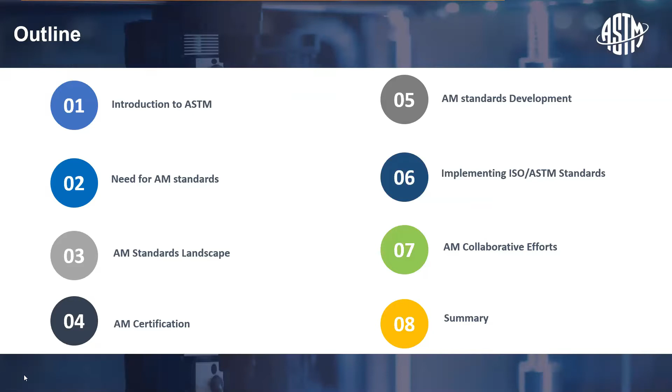So why do we need standards? Why do we need AM, additive manufacturing, standards? Essentially, additive manufacturing is no longer a prototyping technology. It is now moving into an industrialization mode, which means we need specialized, well-defined procedures to do additive manufacturing activities. So before going into those details, let me introduce what ASTM is and what we are doing

from a standards perspective. ASTM International is an international standards development body, and we have standards from the oil and gas industry to construction, spread into a wide variety of industries, and we have more than 12,800 standards so far developed and used widely across the world. It's not based on the US alone. More than 60% of the standards are currently used outside the US, and they're applied in 90 plus industry sectors.

ASTM International has more than 30,000 committee members, and we leverage the technological know-how of these committee members for developing the standards. And we have more than 140 different technical committees working on developing multiple standards. So this is a very brief snapshot of what ASTM is. As we move on, I can share much more details.

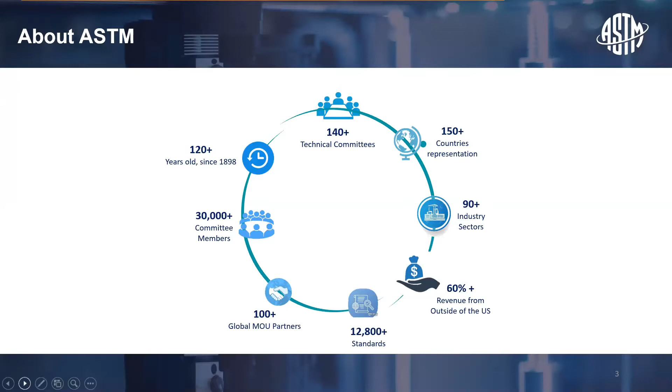So when it comes to additive manufacturing, like any other technology, we need standards to move through. Now in almost all industry sectors, additive manufacturing is at the tipping point of adoption. So we need standards, we need qualification processes, we need certification. What standards can do is ensure process control, give you an assurance of your quality, define different levels of criticality, reduce the risk quite a bit, and by that reduce the cost and drive the larger adoption of additive manufacturing.

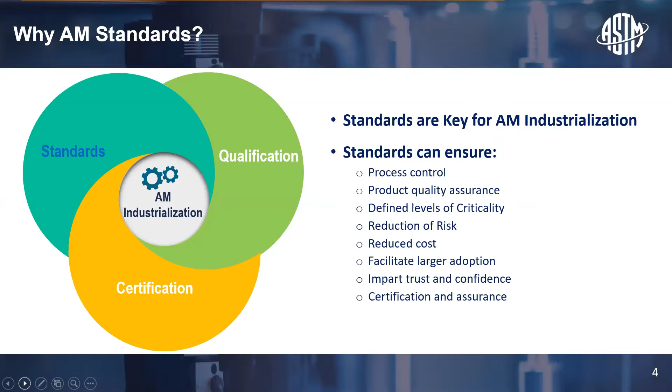Another two important aspects are to impart trust, and it can also provide support for certification and quality assurance. So when we look into additive manufacturing standards, one of the important aspects was to see what standards are needed to drive the industry. So there is the Additive Manufacturing Standardization Collaborative. It was a collaborative effort between ANSI and America Makes.

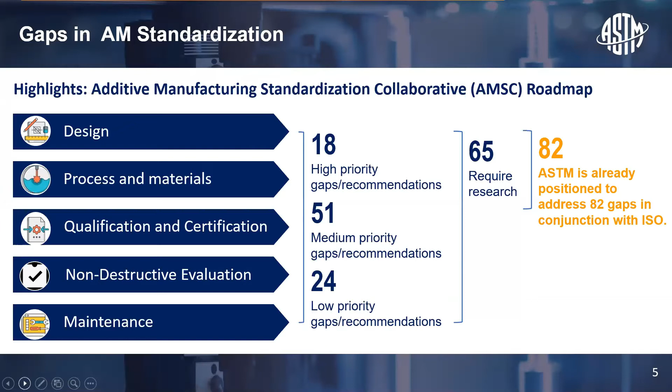They categorized different areas in additive manufacturing into design, process, qualification, non-destructive evaluation, and maintenance. And they found more than 18 high priority, 51 medium priority, and 24 low priority gaps. Out of all, they also found that more than 65 such gaps need R&D, research and development, to move further. Filling those standard gaps is not easy because additive manufacturing is a relatively new technology, and it has boomed in the past few years. So we don't have enough data to look upon, and

input is from all the people involved in it, and multiple organizations are working on the standards. That could cause potential duplication as well as overlap of what we are working on. And we also need research and development as well as resources to do validation experiments. So these are all the things which limit the standards.

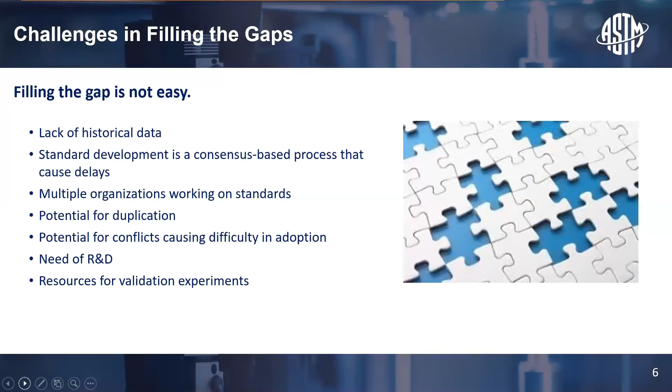If you look into the current additive manufacturing standards landscape, there are about 25 plus standards published by ISO and ASTM together, and another 50 plus standards currently under development. You can categorize these available standards into 3-4 buckets, like general additive manufacturing standards, application specific standards, feedstock material standards, process and equipment related standards, and organizations are also actively involved in developing these AM standards specifically for their industry sectors.

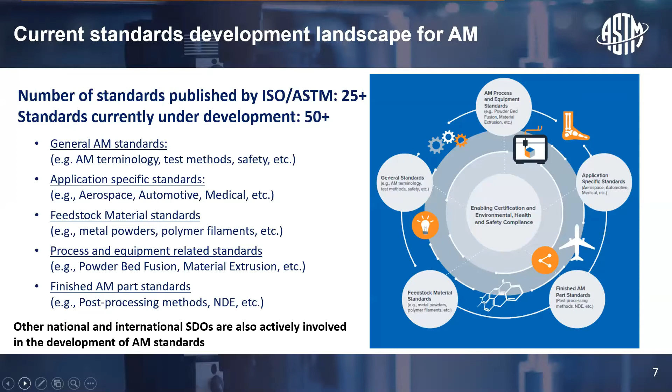When it comes to certification, based on an earlier analysis, one of the major hurdles that additive manufacturing industrialization is going to face is in terms of certification. For the next 10 years, certification of finished parts and products, then quality and standardization of material, and quality are the stumbling blocks that we need to face when we look into the industrialization of additive manufacturing. And this can be addressed at different levels: international bodies, national agencies, different end users, and organizations like that.

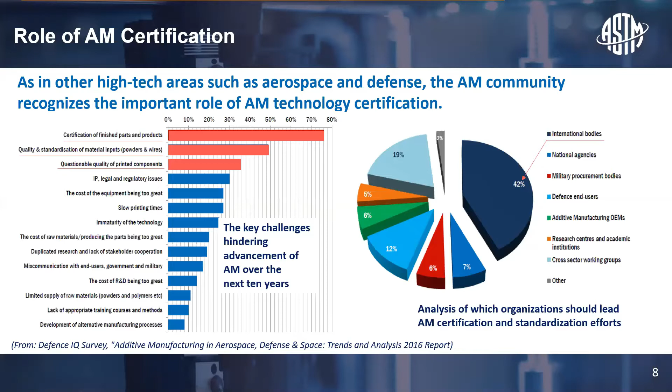But for certifications, the most important thing that we need is standards. At the moment, there are no broad certification frameworks. Even though certification programs have started, they are not complete. If any organization wants to provide such an end-to-end solution, definitely we need enough standards which can address it.

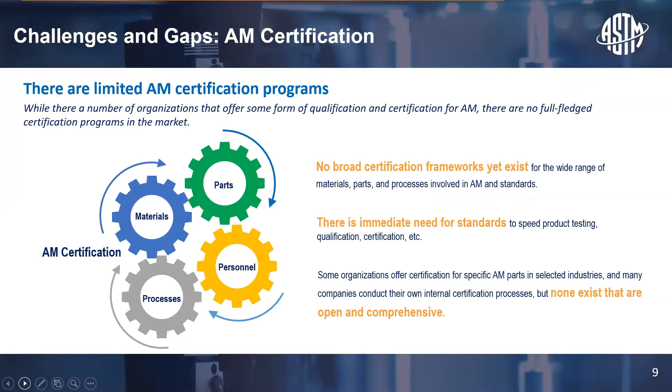So how do we help accelerate additive manufacturing in all industries? It's not specific to aerospace or medical, but considers all different industries for manufacturing. And the additive manufacturing footprint at ASTM: at that time, the first additive manufacturing standards committee started.

F42 and ASTM also have collaborative agreements from different standard development organizations, and one of the notable ones is the partnership SDO with ISO TC 261, which just happened back in 2013. In fact, this collaboration was a strategic one because it drove the additive manufacturing standard development process at a much faster pace. 25 standards are out right now.

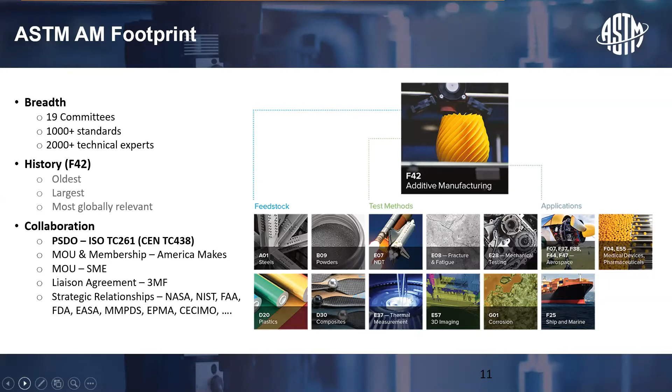In addition to the collaboration with different standard development organizations, ASTM also has collaborative efforts with NIST, FAA, EASA, MMPDS, and organizations like that. So a quick fact about this ASTM F42 committee, which makes standard development, is that, as I said before, it started in 2009, and we have more than 800 persons involved in it. 25 plus standards have been published so far, and 50 plus are under development.

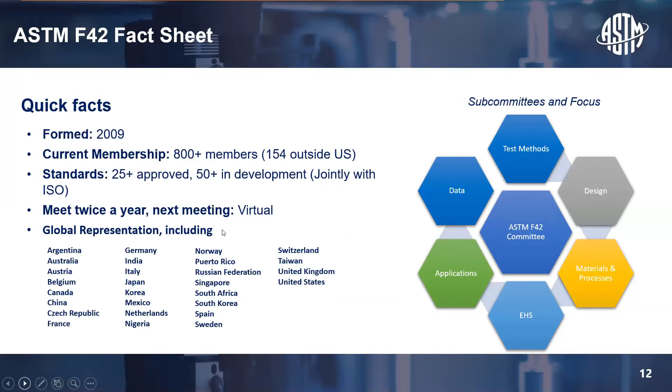If you see the structure of ASTM F42, it consists of multiple committees called test methods, design, material and process, environment, health and safety, applications, and data. Data is the latest one added. You can see who leads this effort. These subcommittees are led by industry leaders or institutes. All these committees right now go from F42.01 to F42.07. These are currently active, and F42.08, as I said before, is the new committee started for data.

This is the standard development structure followed by ASTM and ISO together, developed by ISO ASTM as a roadmap towards development of standards in the coming years. There are 3 tiers. The first is the general or top level standards, which can be applied across any industry, any process, so it is process agnostic or material agnostic. Further down, it becomes category based, more towards the process and equipment and finished parts. And at the specific level, standards are developed for very specific applications or industries. This is the approach ASTM and ISO are following.

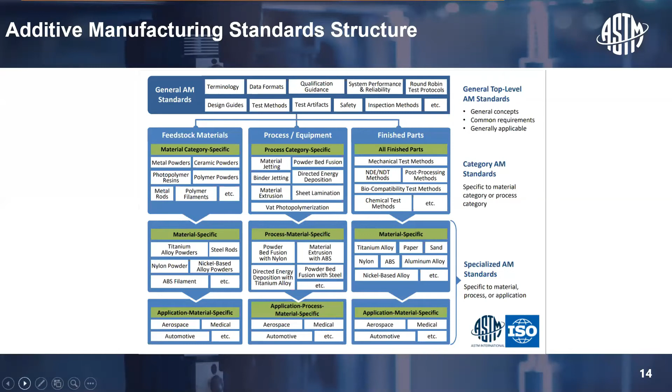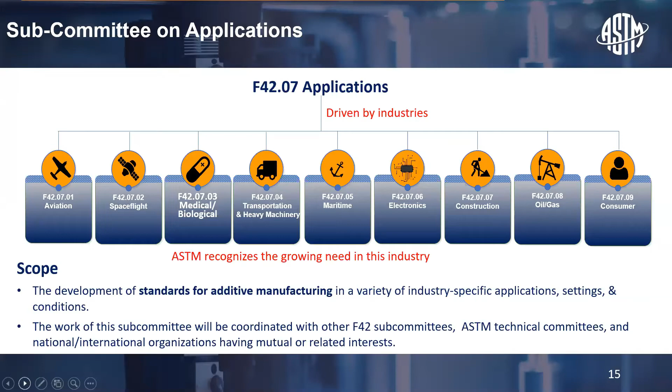Into an AM process chain. We know that the additive manufacturing process is a complex one. It is similar to any other technology, but it is complex because of the multiple stages involved, and each stage has potential variabilities, whether it is design, feedstock, material and process, or post-processing. We need tighter control in all these stages. All the standards under development or already published are focusing on each and every stage of the additive manufacturing process.

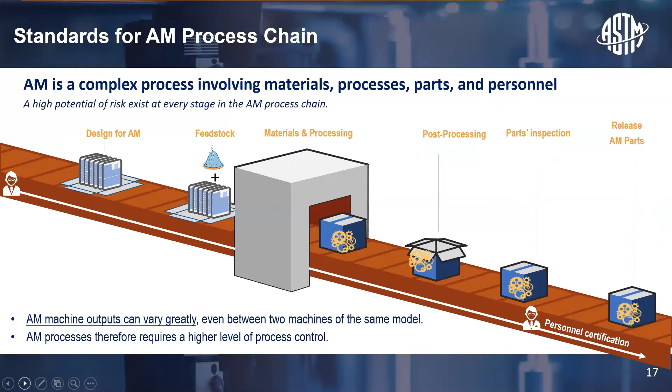Here is a snapshot of different standards currently published. Most of the standards you see here are already published, and I put them in different buckets. To start with, whether you're experienced or new to the additive manufacturing industry, the first standard you should look at is ISO ASTM 52900.

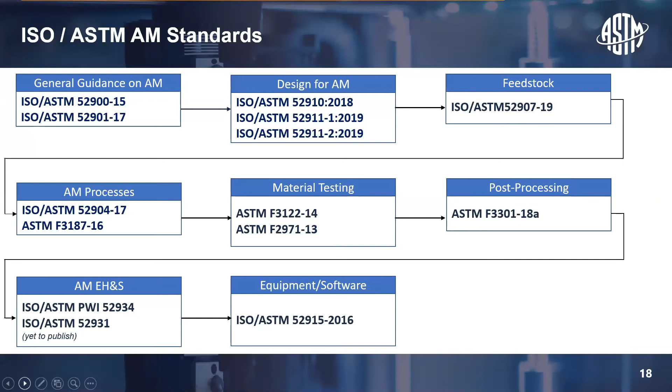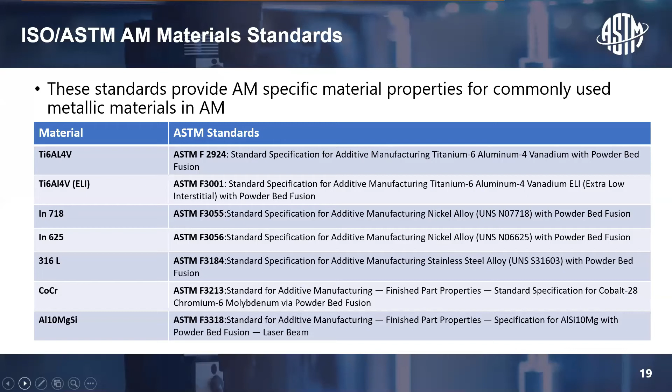When it comes to material, there are material specifications particularly for additive manufacturing materials. Materials like titanium or Inconel have material specs in conventional manufacturing, but the specs here are targeted to additively manufactured components. So if you're looking for a finished part in cobalt chrome, you should look at ASTM F3213 to see the standard specification you need to meet. These are the material standards currently available under ASTM.

Qualification is another important aspect. We have a lot of standards, but how are we going to use them for a meaningful purpose, for qualification of your facility? This is a list of standards you can consider for qualifying your process. For example, ISO ASTM 52930 is about to publish, maybe within 1 or 2 months; it's currently under ballot. Another one is ASTM 52941, to check system performance and reliability. This is also going to publish soon.

Now it is in a draft international standard form. And 52904, which I mentioned before, can be used for qualifying your process itself, and that standard is already published. And ISO ASTM 52902, the standard is about to assess the capability of your machine by using test artifacts.

And one more standard that you can look for is 52920. It is not yet published. It is a new work item proposal that is basically on qualification principles for an additive manufacturing site. So if you have these 3 to 4 standards in the beginning, I think this is the first step towards qualifying your process in your premises.

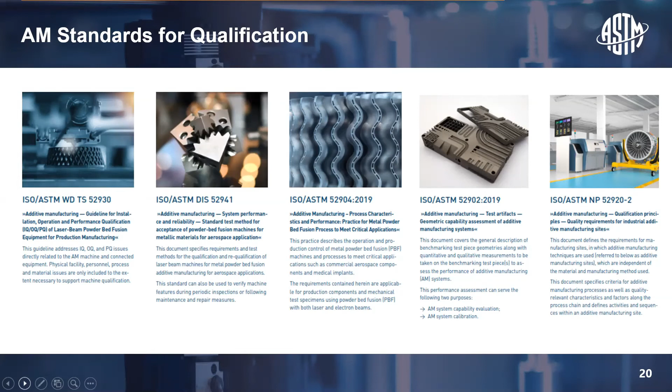So now we move on to the collaborative part of additive manufacturing. So we have seen the standard development side of things and how we are going to drive the standard development with some collaborative efforts. So keeping that in mind, ASTM has come out with a unique activity called Additive Manufacturing Center of Excellence. So what the Center of Excellence does is it bridges the gap between standard development and the

collaborative activities. So we know that standard development is a consensus-based process and it takes a long time since we don't have enough data out. There are delays in getting it done. So the main aim for the ASTM COE is to support that part. So ASTM COE supports the standard development activity through research and development by collaborating with ASTM COE partners.

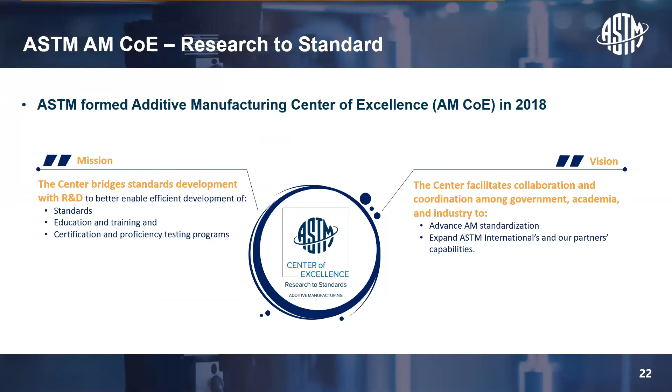Then there's a clear distinction between the ASTM F42 Committee and ASTM COE. ASTM F42 Committee is purely for making consensus-based standards in collaboration with ISO TC 261 at this moment. And ASTM AM COE is mainly for providing a platform for collaborative partnerships with the different stakeholders from the ASTM F42 committee members as well as from the AM community in general. So ASTM AM COE provides a link between the ASTM F42 committee and the rest of the AM community.

And these are some of the research activities that we are currently progressing with to support different standard development activities. You can see that we have design, data and modeling, feedstock, AM processes and AM testing and qualification. All those things are linked to some of these committees like F42.01 on test methods or F42.04 on design and things like that. So all these research activities in one way or other support the standard development activities.

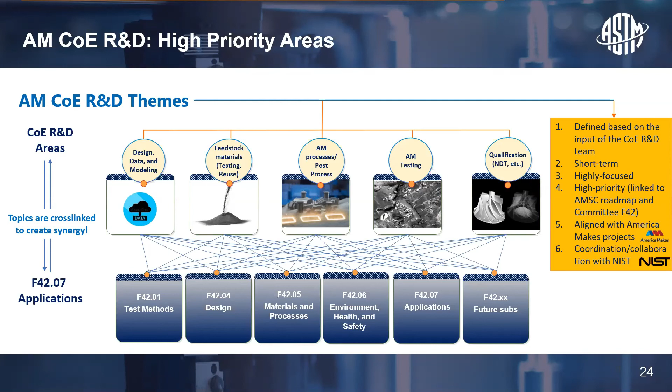So if you see here, this is a typical example of how past research has supported the standard development. So we have 2 rounds of projects completed so far, and these projects are directly impacting the existing standards as well as addressing the standard gaps. So we can see all these institutions over here. These are all the partners for research and development for additive manufacturing with ASTM.

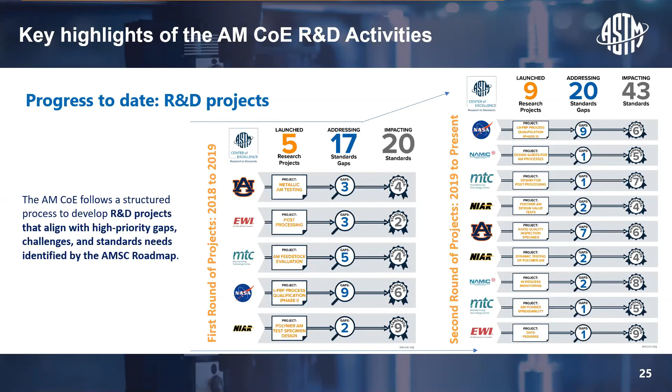So MTC is our partner in the UK, NAMIC is the partner in Singapore, it covers the Asia part as well, and we have Auburn University, EWI, and NASA, they're all the partners back in the US. So with their support, we are doing this research and development and make sure that this can directly impact or drive the standard development activities.

And so we have 2 ways of supporting the research and development. One is called a request for ideas, which is basically from the ASTM committee members. So once we have those ideas, we take those ideas and do research projects with our AM COE partners.

The next one is a new one that's called Call for Projects. This is now open to the entire AM community. So whoever has a research idea which can support standard development, you can propose a project, and if it is in alignment with the standard development process, then we will fund that particular project.

And you can get involved with ASTM in multiple ways. One is, as I said, through these R&D projects, and you can also be a part of the work item development, which can be initiated for the ASTM F42 standard development. And there are a lot of COE events happening, and there are other mechanisms as well which we are exploring to have better engagement or better collaboration with the AM community.

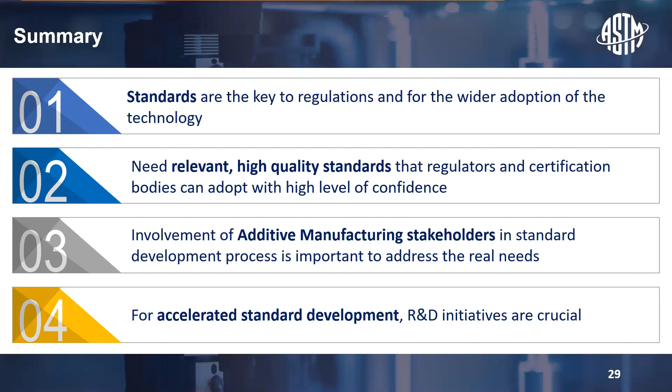So as a summary, what I want to say here is that standards are key for industrialization of AM. They are key for regulations for wider adoption of the technology, and we need relevant high quality standards that regulators and certification bodies can adopt with a high level of confidence. And we also need the involvement of additive manufacturing stakeholders in the standard development process to address the real needs, because only people who are in the industry know what the real requirement is. And for accelerated standard development, R&D initiatives are very crucial.